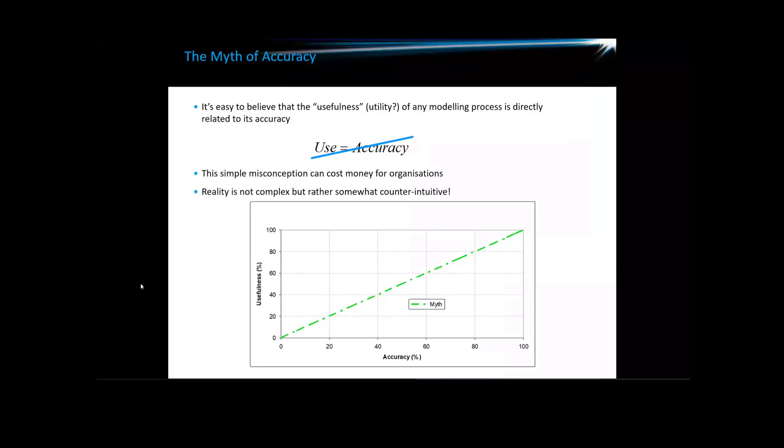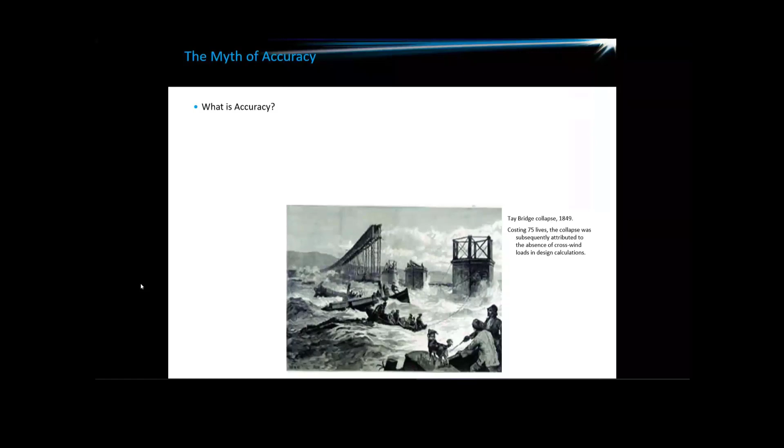So we can talk about accuracy. What do we mean by accuracy? For me, it's the absence of a numerical difference between the behaviour you predict with some kind of model and the behaviour that you measure. That's what I'm talking about when I use the word accuracy.

So it's not a yes or no thing. The absence of accuracy we might call error, and error is a sliding scale that can go from 0 to a very large number, and it can be any of the values in between. Quite a lot of the time people talk about percentage error, and they're quite happy talking about a 1% error, or a 10% error, or a 20% error. People understand what those ideas mean.

So for me, I want to get across the idea that there's this kind of black and white binary state for accuracy - that's not the case. It's not a binary state, it's a sliding thing, and it's really about the degree of inaccuracy. Once you start framing accuracy like that, it helps you think in a slightly more continuous way about the level of accuracy you're pursuing.

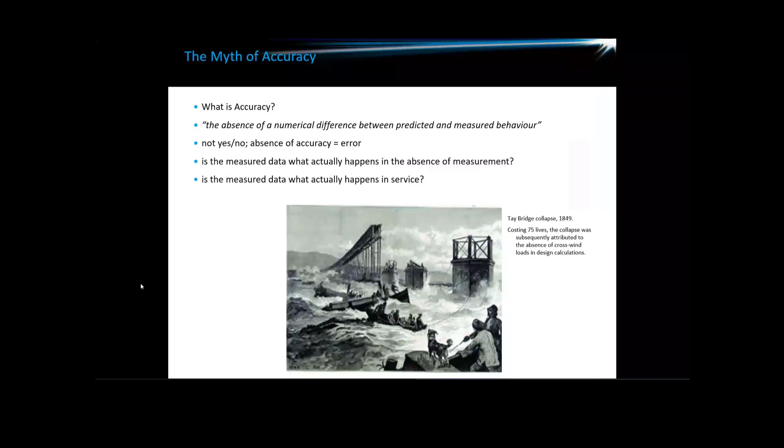If we're in an established company, we can at least get some kind of data for what our customers have done in the past. So if we're a very established company, we might well have good records of what our customers have done in the past. But if you look at, let's say, a new vehicle where you've improved the capability, then what your customers did in the past might not be what they do in the future.

And so even when you've got a good historical database, it can be difficult to guess what's going to happen in service. I'm sidestepping that question. I'm saying that we have to be aware of it, but in the end, what we need to do with our design process is draw a line in the sand, make our best guesses at everything, and then move forward with those guesses.

So I'm sidestepping those questions, and I'm just coming back to this idea that there is something we can do and measure, and there is something we can model and predict, and an accuracy relationship between what we measure and what we predict. And of course, if we can't measure it, we have really no idea whether we're accurate or not.

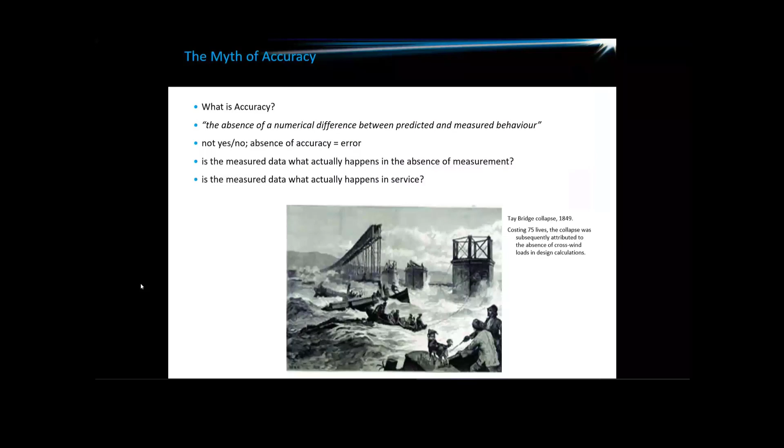So this is another example. This is only 75 years after that first example - basically a single human lifetime from a rail bridge carrying steam trains blowing down because we forgot to think about them, to a four-engine transatlantic jetliner. I think that's an astonishing span of achievement in a single human lifetime.

I apologise that the quality of the image is a little bit low, but nevertheless, this was the prototype Boeing 707, which of course later morphed into the whole family of Boeing 7 Series airliners, many of which are in service today.

It very famously did a barrel roll at an air show - I actually found the clip of the pilot on YouTube talking about this barrel roll. He was told to put on a good show, so he didn't tell anyone he was doing this, and he famously rolled it over the air show. You can see that photograph out of the window of the plane upside down. That stunt got them a lot of orders, so clearly whatever the design process was for this, it was good enough to actually put the plane into service.

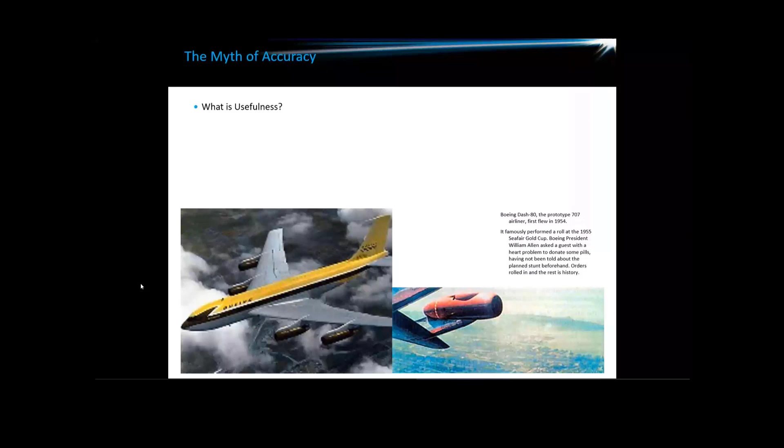Let's talk about usefulness then, because I talked about accuracy and I talked about usefulness. I'm saying that what I'm calling usefulness is how we can use predictions to our advantage during the design process. And this idea of being able to use the prediction advantageously is really key to understanding the message I'm trying to put across today.

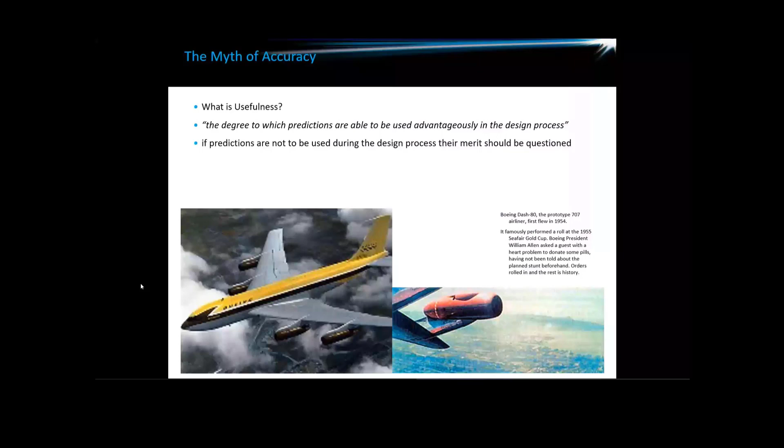If we're not going to use predictions during the design process, then we should, as engineers, ask questions about why we're doing them, because the predictions are using up the resources of the company. And if they're not for anything, then perhaps those resources are spent doing something else. And that really applies whether we're a one-man band or a multi-billion-dollar intercontinental transnational company - that question still really applies and needs to be asked.

Also, if the predictions are too late to influence design decisions, then they're also not useful. You can argue that they maybe make a sort of bank of knowledge for future activities, and maybe they do, but the current activity will be repeated as is. So I'm a little bit cautious about that as an argument.

What we really need are predictions that are available in time to influence design decisions. A decision that arrives after we've committed tooling and committed irrevocably to some route - it's no good telling us afterwards that actually it would have been better to do something different. What we have to do is keep walking down the path we're going.

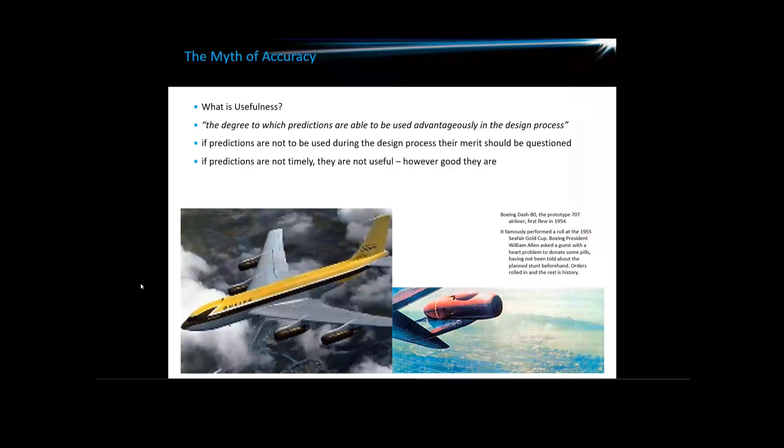And that's a particularly key thing that I think maybe a lot of younger engineers are not necessarily exposed to. I think this idea that a less accurate result, but in a more timely way, is actually more valuable - that's the counterintuitive thing that I'm trying to put across here.

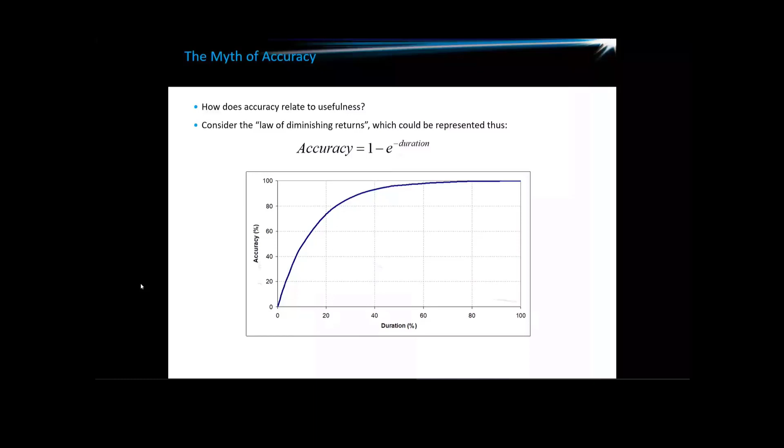So one of the things I suggest is that usefulness is about the absence of duration, if you like. I'm going to construct a little hyperbola here, a y is 1 over x sort of function, and I'm going to basically argue that if we know an answer that is good enough to make a decision earlier, then we have the opportunity to do something more useful with it. Perhaps we can use that knowledge to ask a better question. Perhaps we can allow that knowledge to take us in a different direction to the one we're going to take. But the bottom line is that I assert that the sooner you know something, the more useful it is.

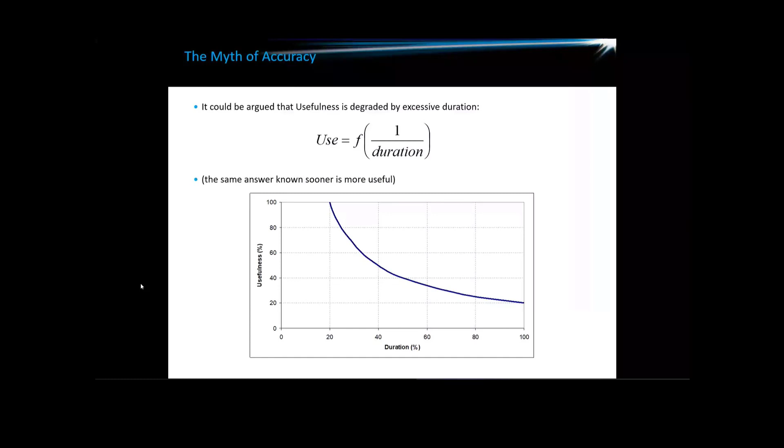And that does lead to another conclusion later as well. Now basically, if we combine those two descriptions, we end up with something a little bit like this. If the usefulness is the accuracy divided by the duration, and the duration is this exponential function, we end up with a curve that looks a little bit like this. Again, I'm not claiming any perfection in this result, but what is interesting for me is that it's definitely true that after an initial increase in accuracy promoting a very steep increase in usefulness, we go past some kind of maximum, and it starts to curve downwards in an ever accelerating way.

And so if I presume that in order for the thing to be useful, it's got to pass a certain level of accuracy, then probably that level of accuracy is past the 50% point on this graph. We can see very clearly that having excess accuracy starts to make the thing less and less useful in an ever accelerating way. This slightly counterintuitive relationship is something we should keep in mind, and use it to avoid excess accuracy.

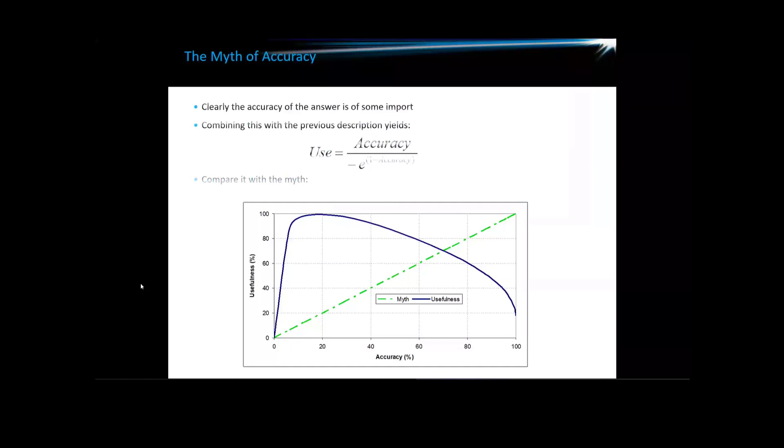So I'm not advocating 80% error in all calculations, definitely not. That would get me fired and shorten all of your careers fairly quickly. It's an artifact of the particular values I've chosen to draw this piece of algebra and illustrate the point. There's probably a threshold level of accuracy, as I said, that whatever we're doing has to pass.

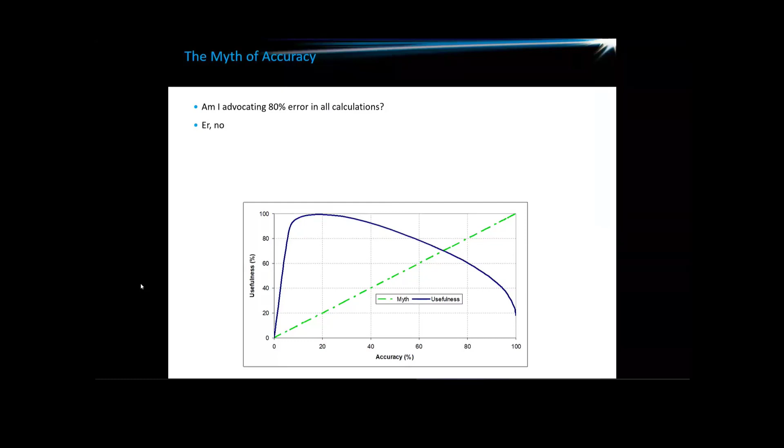So the method has to be accurate enough to support the decision we're trying to make today. It's a very important point that what we need to be doing is supporting today's decisions today, and not necessarily getting ready for decisions that are some way in the future, because there's a lot of uncertainty between now and the future. Spending a lot of resource to be ready for them is not always the wisest thing to do. So we should definitely prioritize the decisions being made soonest, and pursue those.

And we should be able to think about these and give ourselves some idea of how accurate we need to be. As an example, there's a written paper that accompanies this presentation. I talk about the example of deciding whether or not to use different sized tyres on the front and rear axle of a vehicle, called weight distribution. I wrote this sample many years ago as just a made-up exercise.

But in fact, a few years ago, I did it for real with my current employer. We had a recommendation from an external consultancy that we needed to put bigger tyres on the rear than on the front, and the difficulty that gave us was that it halved the volumes of each tyre and quite significantly put up the prices, and also gave us logistical problems. You have a problem that if the wheels are interchangeable, it's quite easy to put the tyres the wrong way around, and so on. So there are a number of reasons why you'd like to keep the tyre sizes the same.

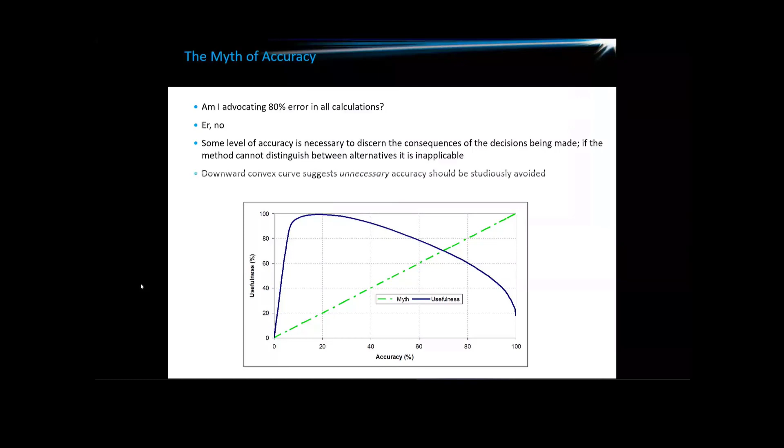It takes quite a lot of discipline to stop when you know your calculations could be more accurate. It's in our nature, all of us who do this kind of work, to keep pursuing accuracy, but we have to resist that. My message is that we shouldn't pursue unnecessary accuracy, and there's a lot of critical thinking and skill needed in determining what constitutes unnecessary accuracy.

But if you start switching your thinking in this direction, my experience is that it yields a lot of benefits. It actually turns into a bit of a game of what's the worst possible model I can use and still answer this question. Sometimes the results to that are very surprising.

The thing to stay away from is this habitual addition of complexity to a model, which is very easy, particularly if you're using an existing model or a template bought from a commercial provider with a very large number of parameters and data inputs. It's very easy to say, I can't do anything until I've got all of the numbers that go into this model, because until then the model won't be accurate.

That's really the most miserable subtraction of value that you can put forward in a process. My advice is to try and guess all of the information that you haven't got, and then very quickly start doing sensitivity calculations on all your guesses. What you'll find is that of the 10 guesses you made, 7 don't really matter, and the other 3 you can put in priority order, so you can start pursuing that information in priority order to add to the usefulness of the analysis.

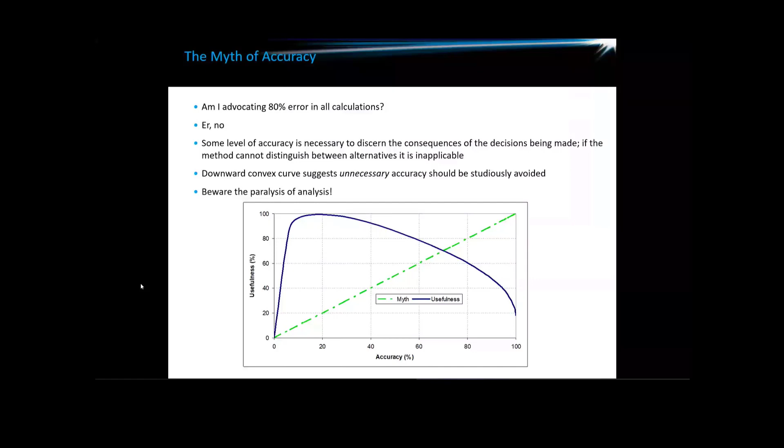If you don't do this sensitivity study and prioritization of the information you're chasing, you'll always be in this position where you're still collating information while people are looking for answers to support decisions. That sort of thing gives analysis a very bad name, and that's why I give talks like this, to try and break people out of that style of thinking.

One of the things I say in my book is that I think the most cost-effective analysis is remembering and understanding what has gone before. First of all, just remembering things is very helpful. If you can remember that a typical SUV yaw inertia is about 3,500 to 4,000 kilogram meters squared, that can help you get in the right parameters to start doing some sensitivity analysis.

Whereas if you can't remember whether it was 4, 4,000, or 4 million, that's less helpful. Understanding what went before is important as well. If you think your experience of the torsional stiffness of a ladder frame industrial vehicle applies to a passenger car monocoque, you'll be very disappointed when you set torsion targets for the passenger car compared to its competitors.

Equally, if you don't understand that difference the other way, you'll end up setting impossible targets for your ladder frame vehicle. So it's really important to understand how what you've done fits into the big picture. I'm hugely fortunate to have had exposure to a very large number of different classes of vehicles operating under very different circumstances, which helps give me a sense of the big picture and how my previous experience fits into the whole picture.

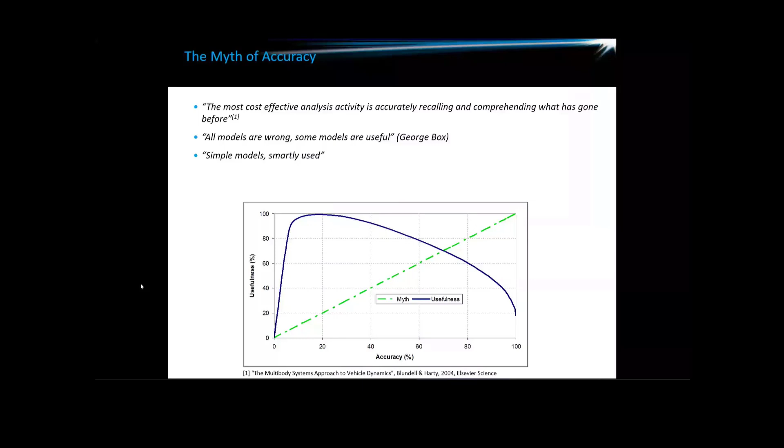So when I put all of that together, I end up with this very simple epithet: I'm trying to use the simplest possible model, and I'm trying to use it in the smartest way that I can. People who know me of old know I was forever saying 'simple models smartly used.' It was a nice soundbite that gave people the idea of ruthlessly pursuing the simplest possible model that can answer the question, but using the model as part of some kind of structured experiment, to understand the design landscape you're operating in - a simple model is much more valuable for that.

So the key question, really the final question, is when you're thinking about adding something to the analysis - some extra effect, whether it's the flexibility of the monocoque in a multi-body model, or high frequency dynamic behavior in a tire representation, or more refinement in a finite element mesh - the key question is: if you do that thing, what decisions will it change when you know the results? If you can put your thumb in the air and pick a value as a torsion stiffness target, then spending a month preparing a finite element model and putting it in a multi-body model, only to draw some slope that's roughly in the ballpark of the guess you made, that's wasted a month. That month could have been used on something significantly more valuable. So this is really the question you need to leave yourself with and filter things by, I would say.

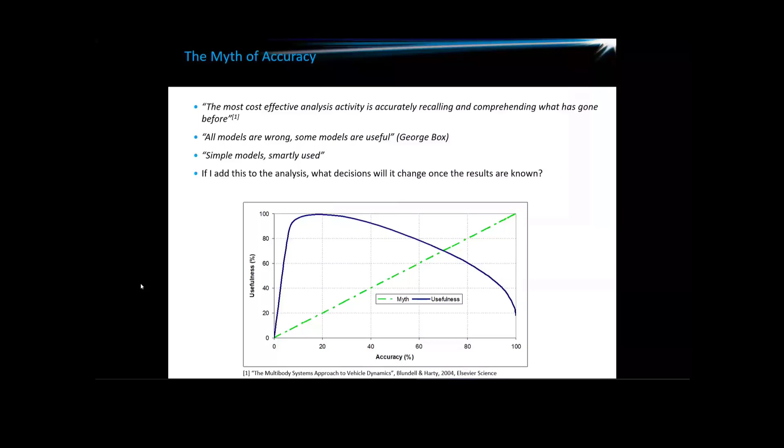So I believe that is the end of my presentation. I have spoken for approximately half an hour. We now have some time for questions. So I'll stop sharing - in fact, I won't stop sharing.

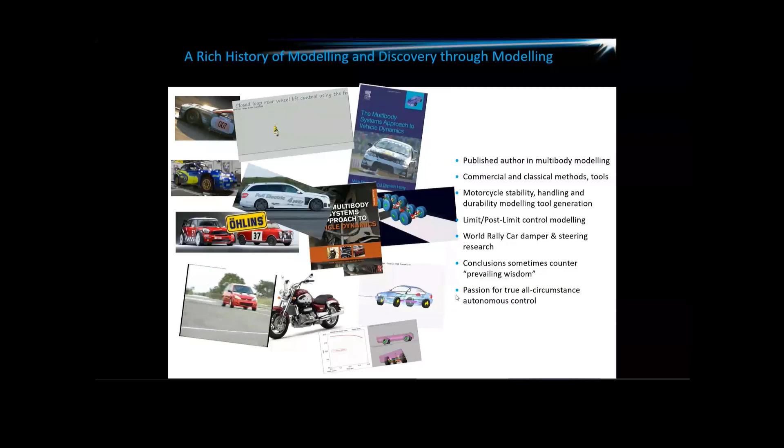But I think there has to be a conversation with the target audience. It was always very difficult for me doing circuit cars because I had to work vicariously through the driver and talk about what do you like, what do you not like, and then try and understand also what made the car faster. Whereas with the rally cars, I had this fantastic luxury of just being able to sit in the car with the driver. And the drivers are fantastic because they can just talk while they're doing all of this stuff, and they can say, I wish you wouldn't do that, or I quite like that bit, or all of that sort of stuff.

Wonderful, well I think we've all had a good time. I certainly have. So thank you very much, Damian. That was really useful. Thank you everyone for attending.

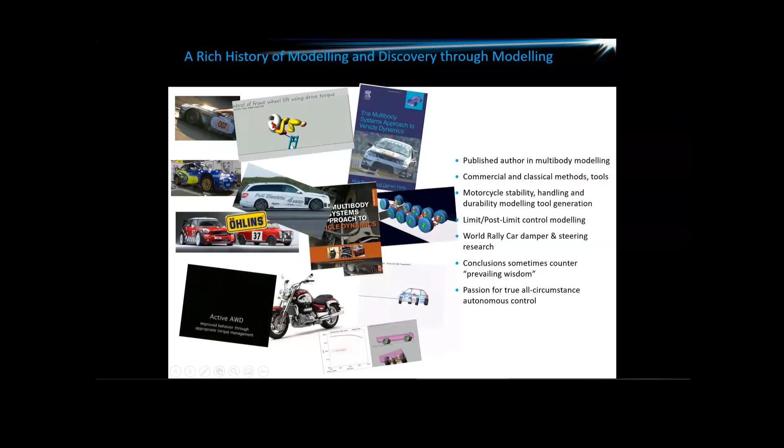Wonderful, well thank you again for all attending. Thank you very much, Damian, for your insightful and really inspiring presentation. Hopefully everyone will find that useful going forwards with their day-to-day work. I think I certainly will. Oh, thank you very much. It's been an absolute pleasure. Thank you for inviting me again.